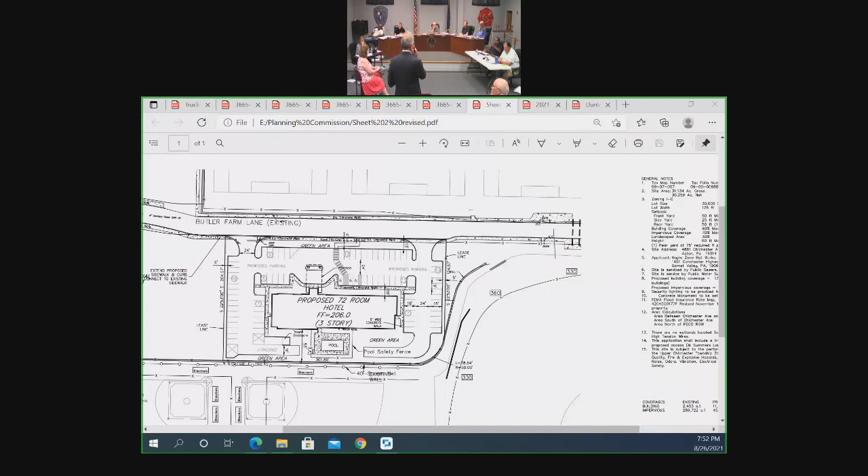Was I trying to get a depressed curb to Butler Farm Lane there? Yeah. You don't think that is appropriate? Well, we can remove that. That doesn't help our grading differential between the parking area and the street. Right, we'll remove that.

It's not like it's a tremendous amount of relative difference. It's just we have very little horizontal length to make up any vertical difference. If that works, that would be maybe our first attempt. If it interferes with what we need to do with width between the portico and the parking space, then we can pull it over here and then switch back either way to get up to the sidewalk adjacent to Butler Farm Lane.

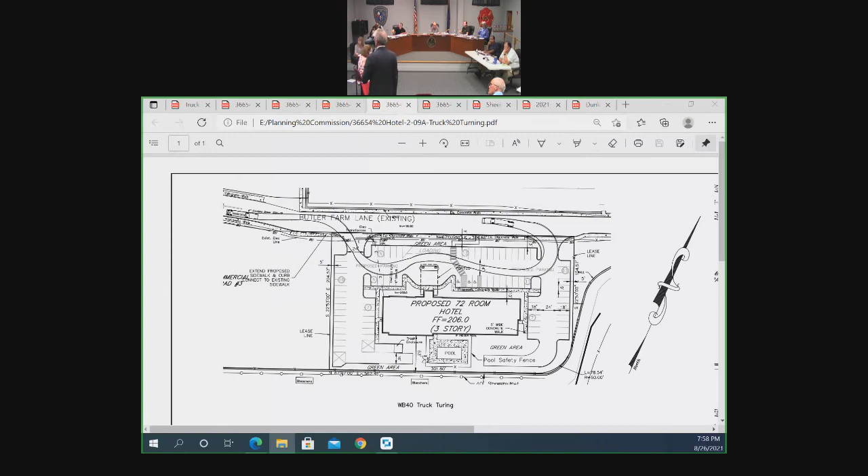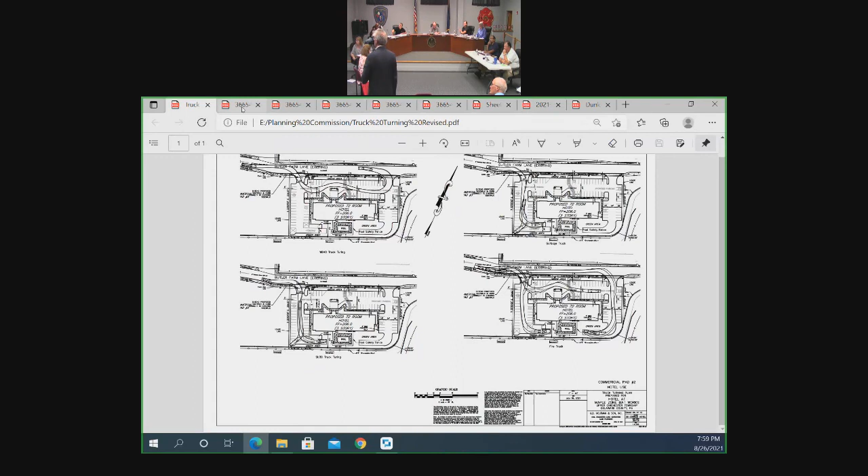I think that was the right plan. All right, if maybe pan down the sheet. All right, that's the load. Where's the trash? No, the one you had previously. Yes. Does that say revised in the heading? Oh, here it is here. Alex, where'd you go? The trash enclosure was originally. Oh no, that's the original one. Wait a minute. No, that's the right one.

Trash truck comes in, pulls in. This is further in. We increase the paving down here so it can back up, and then leave the site without encroaching into parking areas. No. So the trash trucks we're talking about are those front loaders. Yes. Yeah. The comment was, we've got. Yeah, and we understand that, and that's a valid concern. I think we're open to what we can do there. I think Steve just had an issue with maintenance and stuff to leave it a grass way.

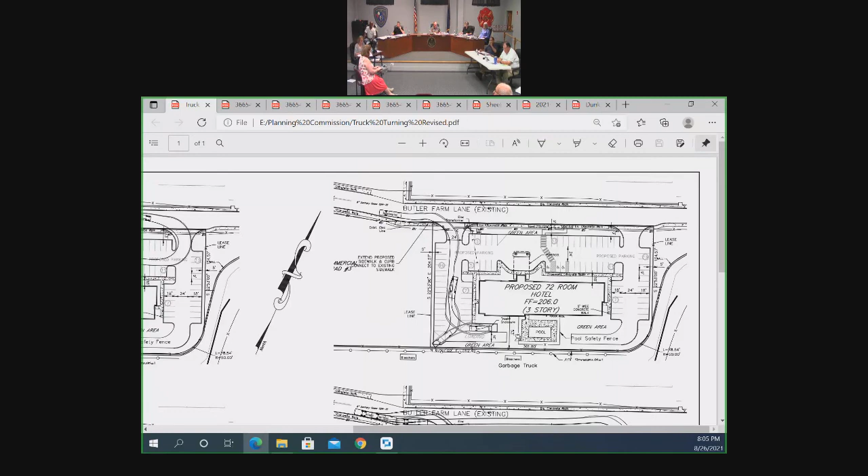No. That makes perfectly good sense. Chichester. We do have, do you have a sheet one there, Andrew? It's an overall plan. So the existing one is here, up here, on that side. Yeah. Yeah, no, we can certainly do that.

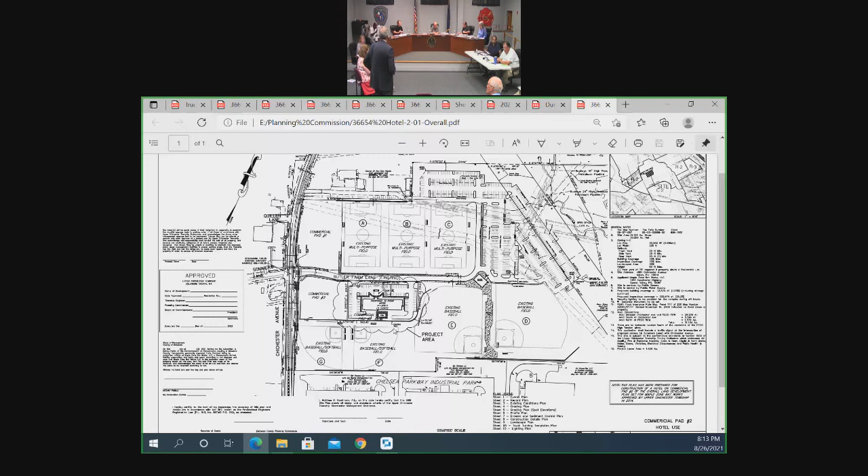Next month, because we still have to wait for engineers to actually. That and our other recommendations. I'm saying that it may not be. Correct, that's what I'm saying, yes. I just want to make sure they knew that it's not necessarily guaranteed that there'll be commissioners this month. Right. We don't know, I'm just saying we don't know. Okay. But I just don't want to have everybody thinking, okay, we still have, the engineers have to work now. Okay. Make sure.

You understand what I was saying? I was saying that the traffic study can't be scheduled for the commissioners meeting until the two engineers actually work it out. After. Still needs to be put in, right? Correct. Thank you.

Right, does anybody need a break or are we good to go? Ooh. All right. The person for Dunkin Donuts, I'm sorry. The person for Dunkin Donuts is here in attendance. Okay. Would you like to come forward and announce who you are for the record? What'd you say? Oh.

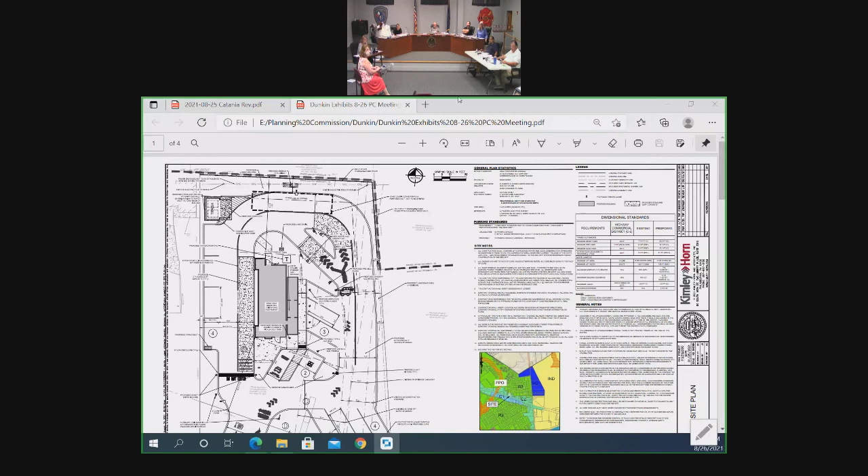And the last submission they made was in May. But as Alex pointed out, there's been some inconsistencies in the truck turns as they've come into the site. That parking stall is another issue because, unless that gets adjusted, that could potentially be a problem. And I know Alex has expressed concerns about those two spaces right in front of the entrance. So I think there's still a little bit that needs to be worked through.

And then the other inconsistency was the fire truck. What they presented to the fire marshal was I think about an 18-foot wheelbase. Usually we see a 22-foot wheelbase, but the plan that was submitted with the land development was a shorter wheelbase of about 16 foot. So just some clarifications that had to get ironed out with truck circulation.

And then the loading zone in the back, it seems like it would basically be blocking your bypass lane. So one thought, I guess, ties in with the zoning condition. The zoning condition had stipulated the hours of operation. Right. And I think your plan typed in delivery hours as opposed to hours of operation. So if the hours of operation are from, I think, 5 a.m. to 8 p.m., right?

The deliveries, I think there's going to have to be a coordination that says if the deliveries are going to come at 5, and I don't know if it's a half hour or 1 hour operation, but then I guess it would be best to probably have the hour of opening the business maybe at 6, so that it would be probably easier for them to just use this lane here as a temporary loading zone and get everything in and out perhaps. And then that way it's not really affecting the operations, but that's something that you have

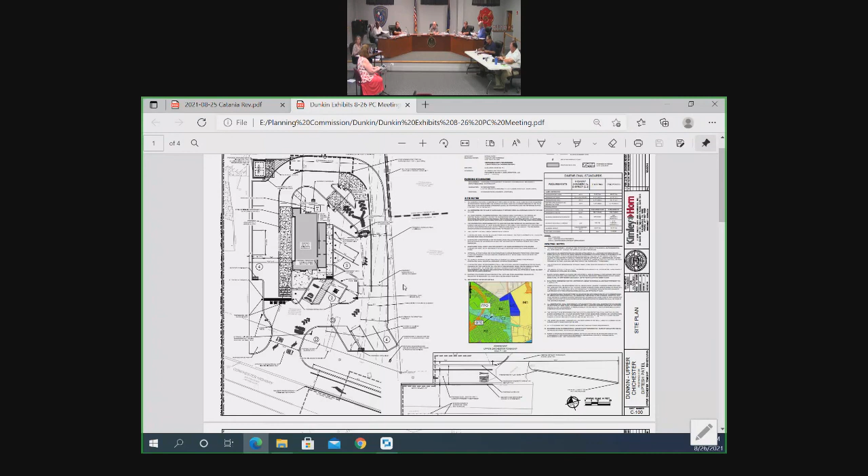All right. We carried forward a different agenda today than we actually had. We did the entire agenda, but not in the order we had intended because of logistics. But we have one last thing, and that is to go back to the public and ask them if they have any comments about anything that they've heard this evening, and if they'd like to comment on that.